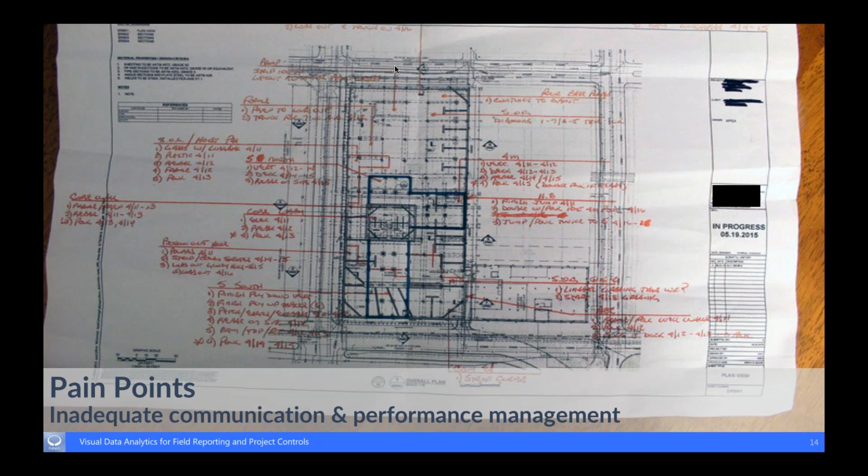Our problems aren't only associated with reporting, but also with our planning. Over the past 10, 20 years, perhaps closer to 20 years, our practices of planning and master planning have significantly advanced. But when it comes to understanding how much work could be done on a daily or weekly basis, there's still a whole lot of room for improvement.

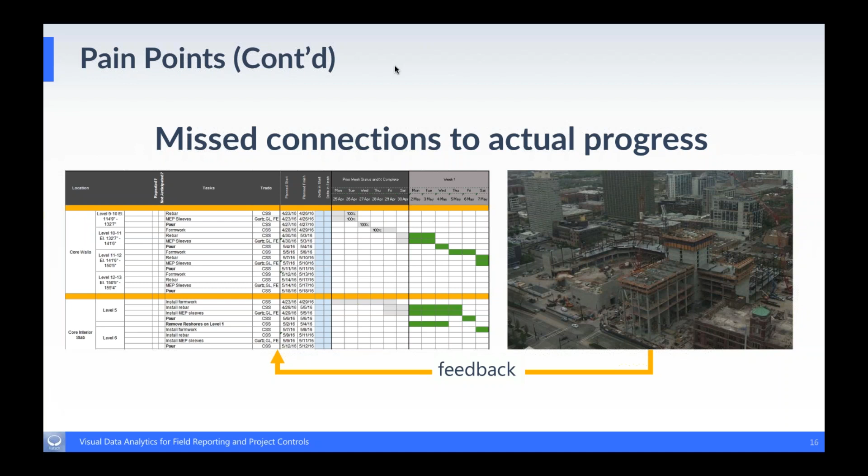Part of it has to do with the fact that even in projects where we bring last planners to be part of our planning process, we still see a lot of disconnection from actual progress. Most people involved in planning do not walk the job site daily to see how much progress has been achieved. And if those numbers are being reported, they're not being integrated as a basis of the plan, so we can improve and address issues before they surface on the job site.

And the last pain point we see with the cycle of planning, doing, checking, and adjusting is insufficient risk management.

Today, we still use metrics from earned value, schedule performance index, cost performance index, or for lean construction practices, we use percent plan complete. These are great metrics, but they're retroactive. What they mean is that they help us understand success and failure in the past, but they do not offer any insight about potential problems about to happen when it comes to looking at the schedule.

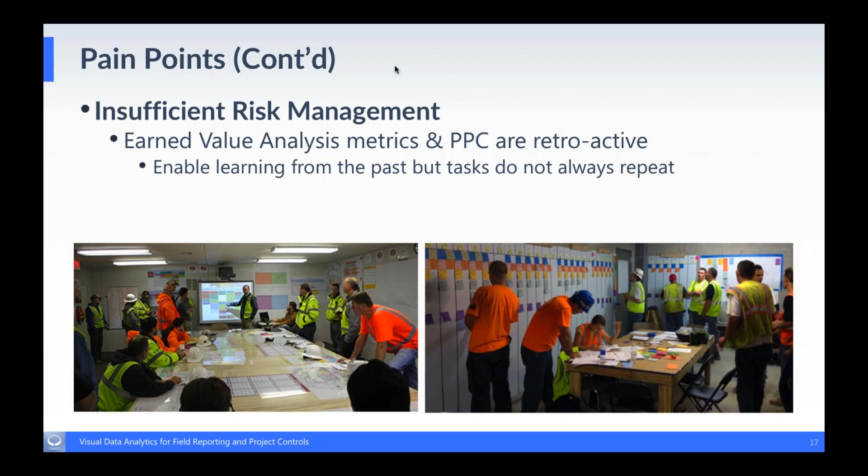So instead of retroactive practices, what we really need is proactive, because things in construction don't repeat. If they don't repeat, opportunities for addressing them become significantly minimal. So instead, we need proactive strategies that can identify risk on the job site, communicate that to our trades, so we can tap off potential delays from happening.

So what is the opportunity that we see? Earlier, we mentioned visual data. The growth and expansion of visual data on our job sites has been on two fronts. On one side, building information modeling has become a dominant method for communicating data across various life cycles. BIM is dominantly being used for design. A lot of construction companies are also using it for clash detection and coordination purposes.

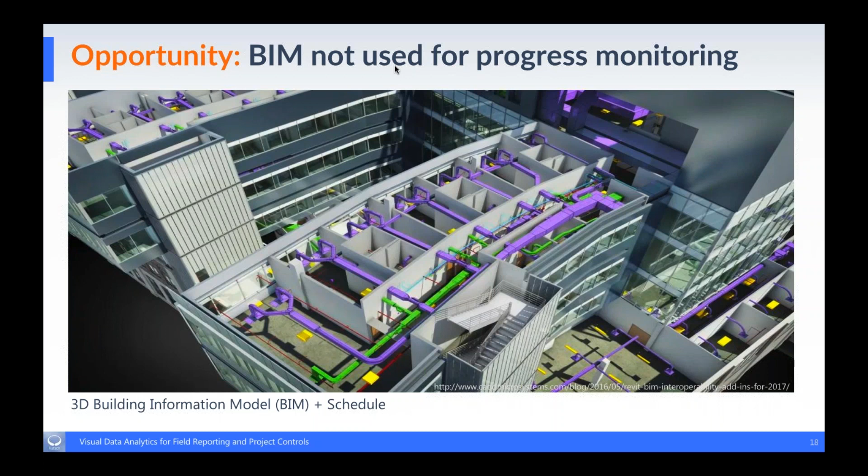But we also see that as a basis of assessing quality of the schedule in 4D BIM. What we see as an opportunity is to extend the application of the BIM that already exists and use that as a baseline for tracking progress. Be able to use that to communicate who does what work in what location, and see if we can understand how much work is being done per work location, per work package, or per trade that we have on the job site.

The other opportunity that we see is with respect to the feedback to that plan, the visual data that's being captured on job site, which is not actionable today. So as you saw in the second poll question, a lot of companies are today capturing daily photo logs. We all walk around with our smartphones, take photos, videos from various locations.

We use professional photography, an example of a company that you see in the middle that's based on reports published by them and our communication. On most of their job sites, they capture close to about 1,000 images per day. Time-lapse cameras in 2017 have almost become dominant, so we see 1 or 2 cameras on almost every site. People are using action cameras to walk indoor locations, videotape work, and use that for various applications.

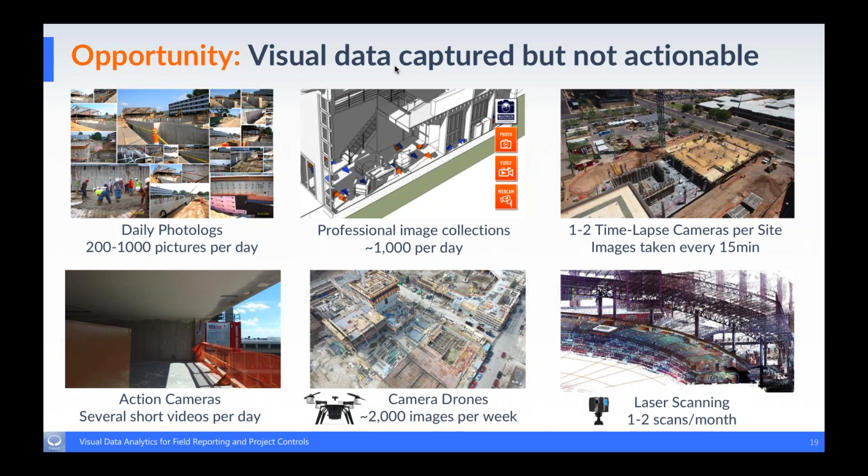Drones have provided a significant opportunity for this visual data capture. The speed and amount of visual data being captured has significantly grown. And lastly, as we've seen through various great use cases that Fiatech has presented over the past 10 years, laser scanning has also become a dominant tool. So all of these various kinds of visual data could be used as feedback to the plan, but as they are today, they are not actionable.

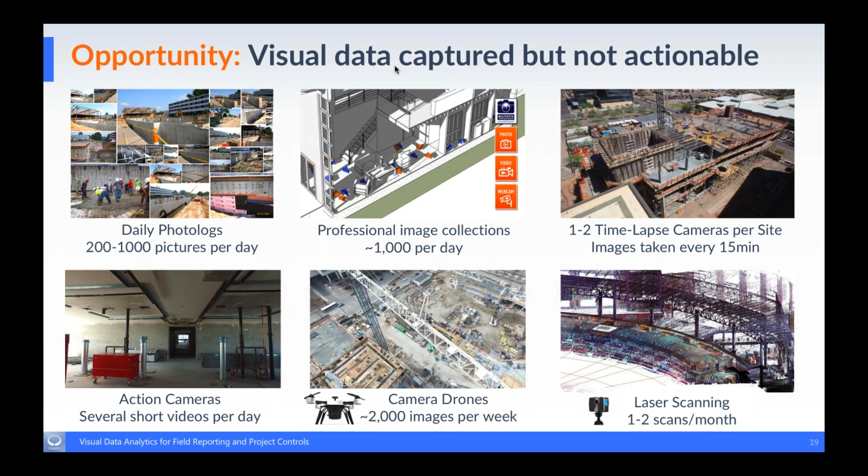So what we've been focusing on as part of the effort we started at Fiatech with CCC and also with Zachry is to see how we can integrate our visual data with the BIM in the form of visual production management systems. The idea is pretty simple. Our intent is to take advantage of the most inexpensive form of visual data, being images and videos, automatically generate 3D point cloud models from that visual data over a project timeline, integrate them with the BIM and the schedule so we can form our visual production models.

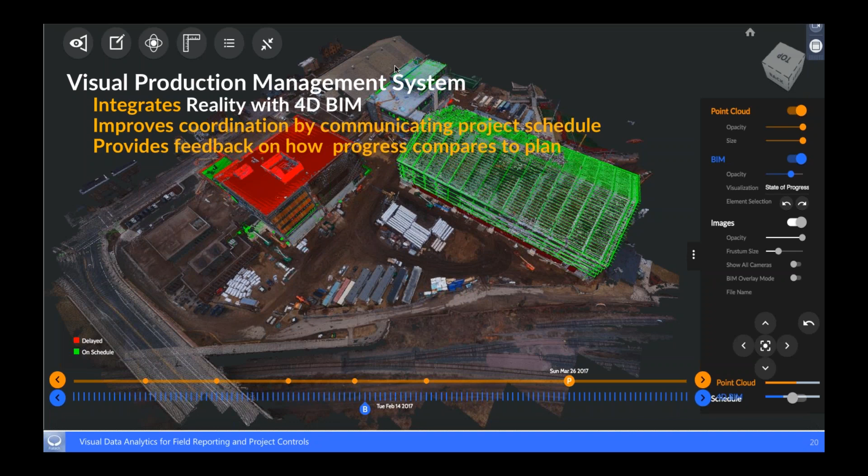Then use these visual production models that show you the reality on the job site versus the plan to understand progress and productivity and communicate the work that needs to be done on a daily basis. We've also looked into machine learning algorithms and their capability in terms of identifying risk based on the trend of progress and productivity, and see if we can share that insight with our project teams so they can tap off problems before they surface on the job site.

So the intent is to be able to take these into coordination meetings, use reports that are all visual, that show you how much work was expected to be done, what is actual, and use that as the basis of our coordination. So a superintendent can transform our coordination to center around risk and how we can tap it off before it surfaces on our job site.

So with that, I want to give you a broad picture of what this visual production management cycle looks like. It all starts with visual data capture. So we have images, videos, and perhaps 360 that would be captured through cloud-based engines, for example the one that we've also developed. We can generate reality models over the project timeline.

BIM that is being used for coordination will be integrated with the schedule and will form what we call a production level 4D BIM. The production level 4D BIM would be integrated with the reality model and will form a 4D visual production environment.

Within this model, we will be tracking progress per location, per task, per work package. We will track productivity by tying the input, being the worker hour, and using machine learning algorithms we can identify risk, bringing that into a form factor that the superintendent, who may not be savvy with BIM, can use on the job site to revise the basis of the plan, look at the schedule, and use that as a step for the next cycle.

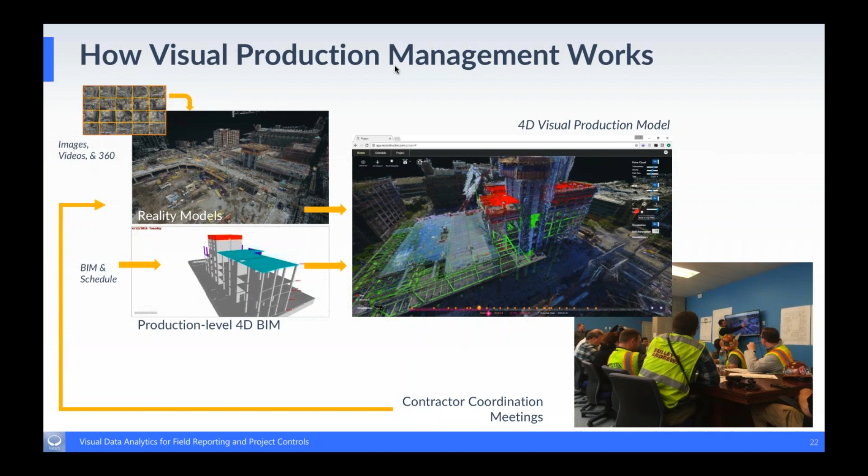In that spirit, we looked into two specific projects. The Mars Rover project was based on a technology that was developed earlier, and this project was supported directly by CCC and Fiatech with the intent of improving how we do visual field reporting. The idea was that now we have all this visual data, the images and videos.

Now we have the ability to generate point clouds with them. We also do a lot of laser scanning. What are the opportunities that we can take advantage of with existing visual data to localize where our field engineers are in 3D on the job site?

The intent is to take advantage of these photos to automatically understand where we are on the job site, to be able to offer on-demand and mobile access to project information. Imagine you're walking on the job site and you take a photo. We want you to really be able to get access to the information, find your location with respect to a building information model, and use that as a basis for extracting information or reporting back.

So what was the key requirement as part of this project? We wanted to make sure we have a rather real-time or near real-time identification of position and orientation. Now, over the years, perhaps over the past 10 years, a number of technologies have been introduced that can facilitate this. We have GPS, ultra-wideband technology, 3G and 4G that can provide access to cloud-based systems, but each and every one of them, in their own ways, can create challenges.

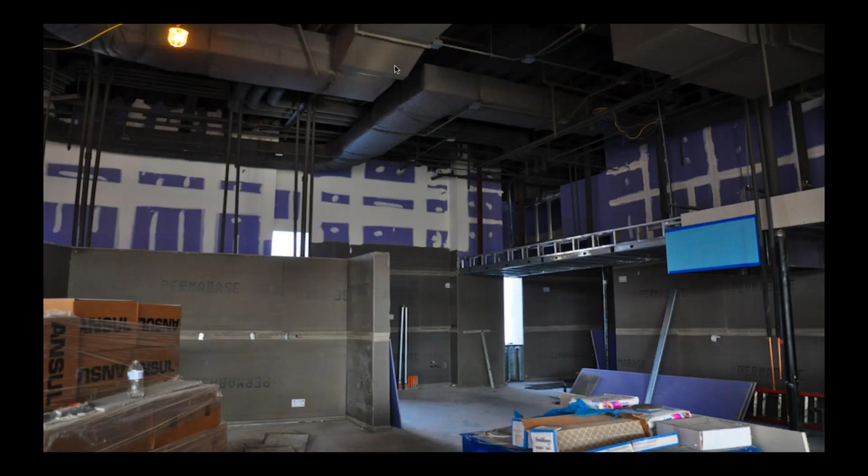So the idea was simple. We wanted users to walk around with their existing smartphone and take photos. The photo would be matched against the 3D models we've already generated, and by identifying the location and orientation of the user, we'd be able to get access to information, or let the user directly provide information as an overlay on the image or as an attachment to the building information modeling elements.

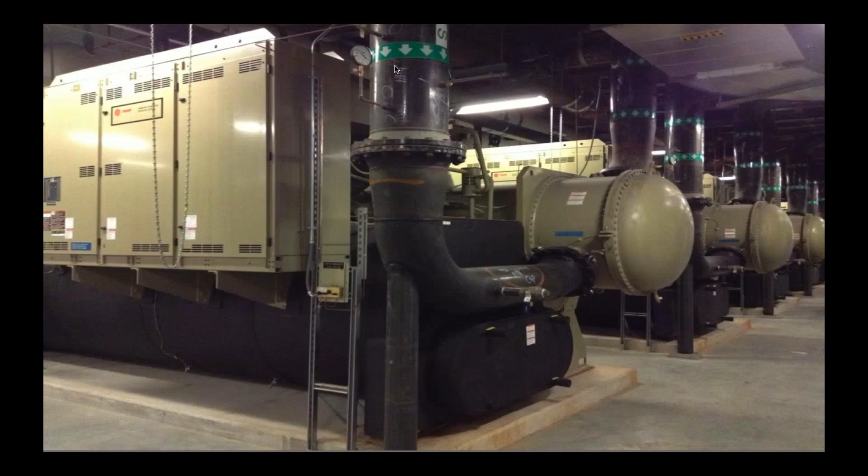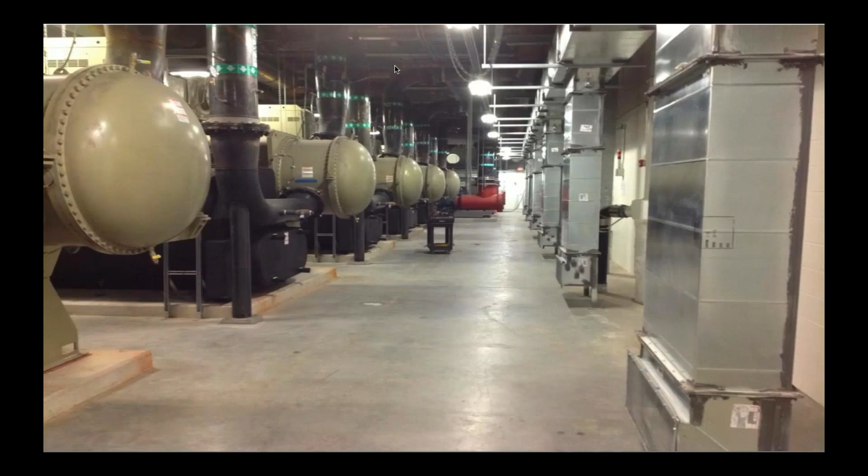Now, in the context of BIM, the idea was that for us to take a photo, understand its location and orientation, and overlay a picture of BIM over the image so we'll be able to see that. Again, the idea is to find location and orientation as it relates to a building information model, overlay that on BIM, show it from various perspectives, filter based on the trade of interest, and make sure this technology is reliable so you can actually use it from various points of view and perspectives.

Now, the good news is that when we wanted to start this project, we immediately learned about the significant amount of development that has been done in CCC. Over the past, I believe, 4 to 5 years and perhaps a little bit beyond, CCC has developed a C3D mobile solution that provides access to BIM data on the job site.

It also has a capability of providing BIM-driven progress tracking. So while you're on the job site, not only can you get access to your project information, but you can directly provide feedback in terms of how much progress is being made, punch list items, or quality control items directly within the BIM environment.

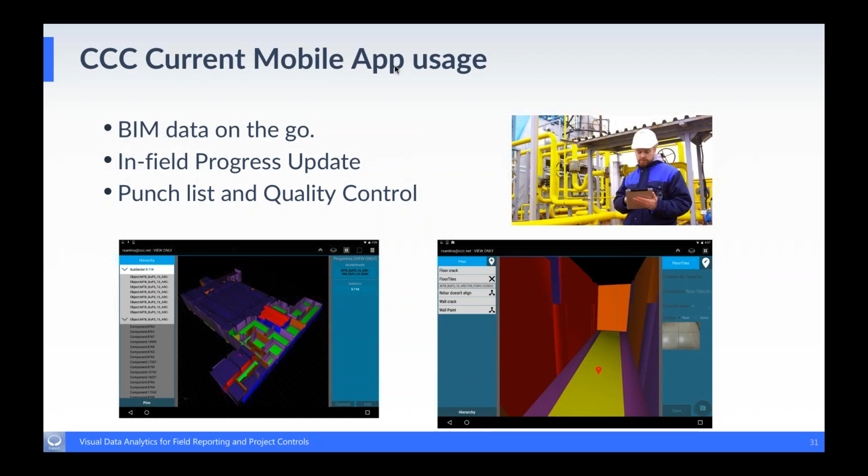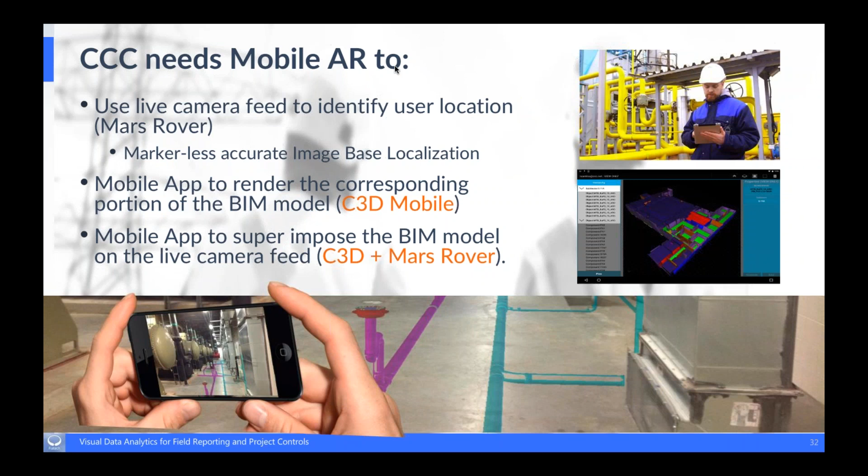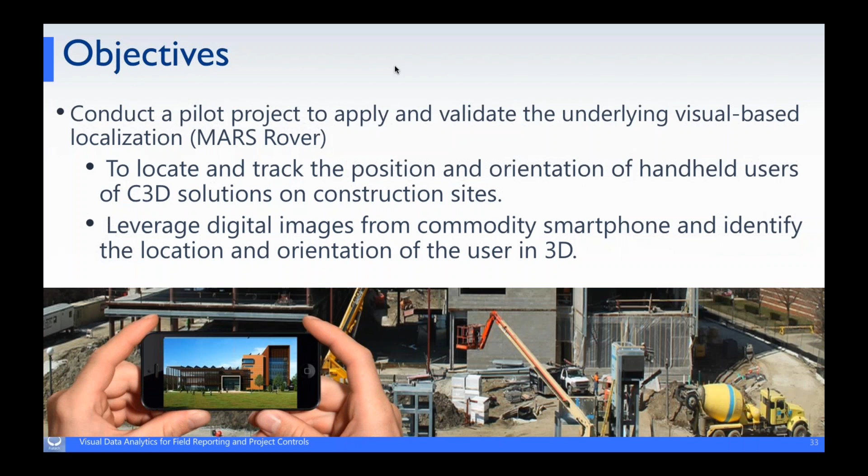Using that as an opportunity and the capability of localizing a user with respect to a point cloud, we wanted to see if we could align our point clouds to BIM, localize and orient a user with respect to BIM without using GPS or location tracking, and tap into the wealth of information stored in CCC's C3D data. Rather than add new kinds of visual data, we wanted to take advantage of existing visual data captured by smartphone.

What specific requirements did we want to tap into? First, field reporting needs to be done on commodity mobile phones, which the C3D solution from CCC already offers. We wanted to associate project information with 3D elements at any desired level of abstraction, regardless of work breakdown structure or model breakdown structure, so users can associate punch items, quality items, or progress reports with the plan, with high precision association within 2 to 5 seconds.

The intent was not to develop a live augmented reality model, setting aside the safety issues. Rather, we wanted a high precision solution that within a few seconds can augment still photos with a picture of the BIM, to use as the basis of field reporting. We wanted this in the form of a cloud-based platform that would work with or without BIM.

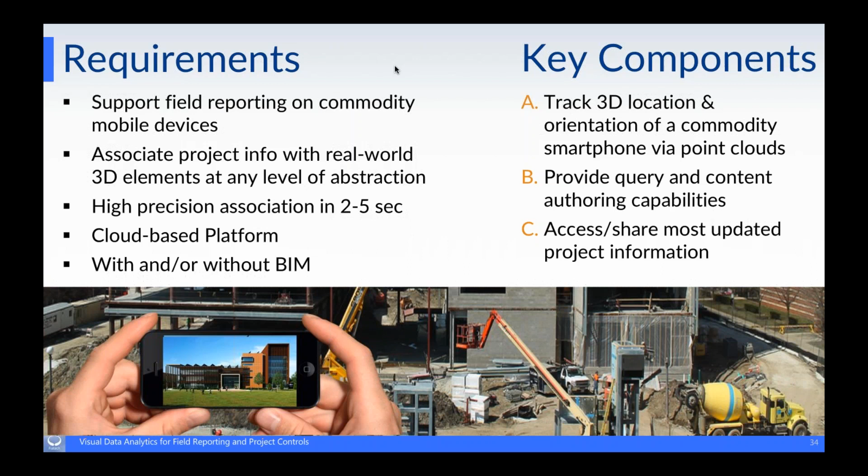So again, three components: tracking location and orientation of any user with smartphones with respect to a point cloud, offering query and content authoring capabilities with or without BIM, and accessing and sharing the most updated project information when connected to data. We had abilities to align static images with 3D point cloud models, and also looked into using videos to map locations in 3D and identify the user's orientation.

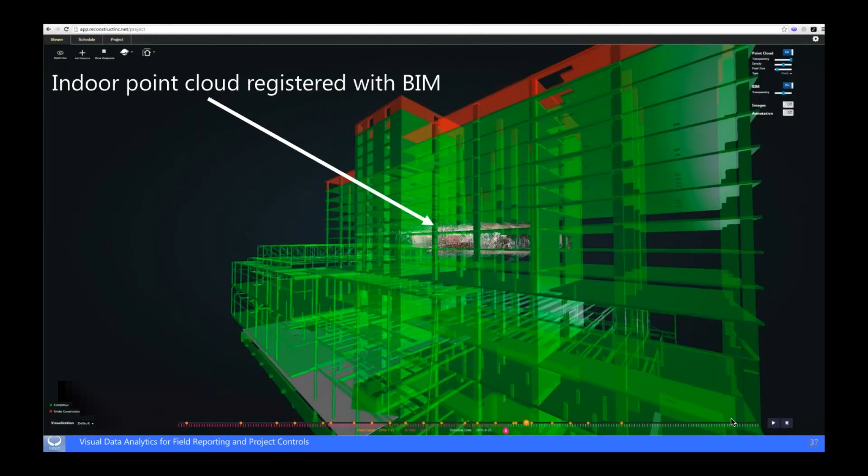Once we have this capability, we can feed it into our process for generating dense point cloud models, like the ones already shown, and use that as the basis of alignment. Once this map is done, say on a Friday, when workers or field engineers come back the following week and start taking photos, we can always localize them against this map. This map can also be aligned with BIM, indoor or outdoors, giving access to BIM information. As part of this, we wanted to offer a number of capabilities.

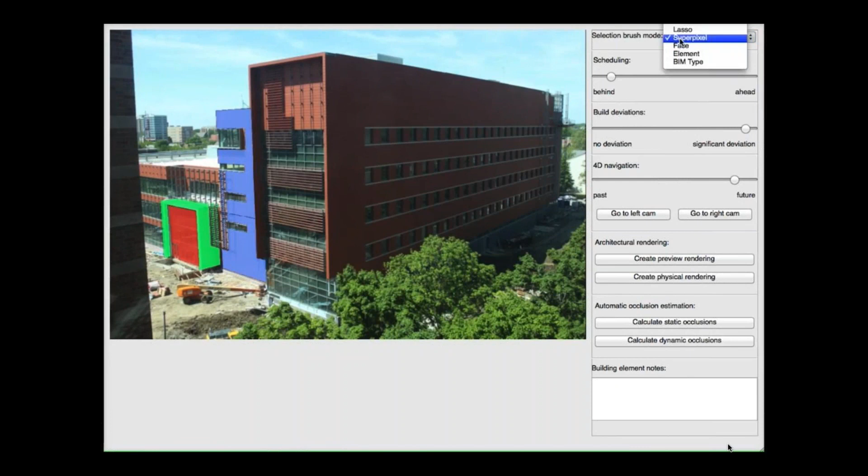One goal was to directly tap into the content of images and work with any level of abstraction. Here I'm showcasing the ability to overlay BIM on an image, with the user manually reporting from any desired perspective using images captured with a smartphone, color coding or providing percent complete as it relates to tasks, quality items, or punch lists.

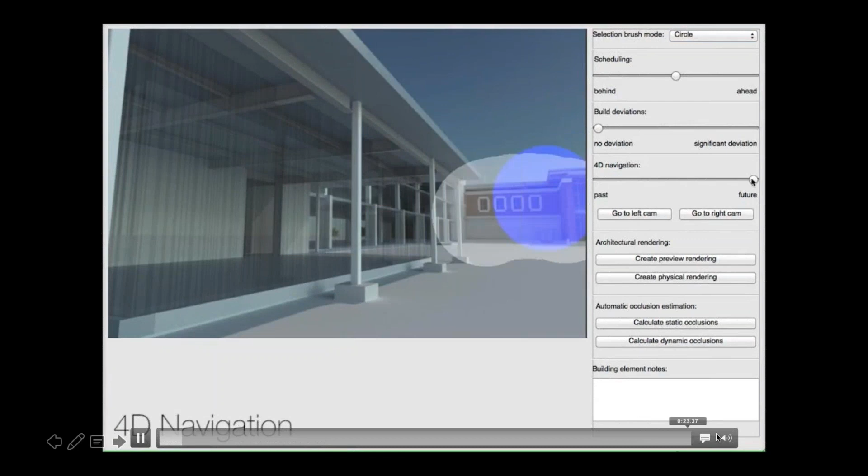You see the different capabilities, and these color codings would all remain preserved over the timeline. You can start with a BIM perspective, interact with the content, scratch the surface of your BIM image, and go back in time to get access to the most relevant images. You can also look into capabilities of doing that with respect to an image—sorry, I moved too fast here.

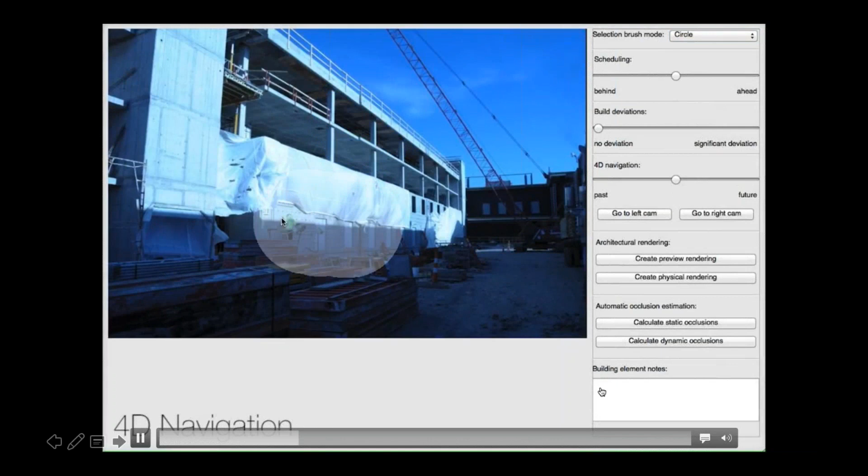Here we show the circle brush selection mode. We can click on the surface of the image, brush over the surface, and go back and forth to find views of BIM or views of other images that have been captured over time.

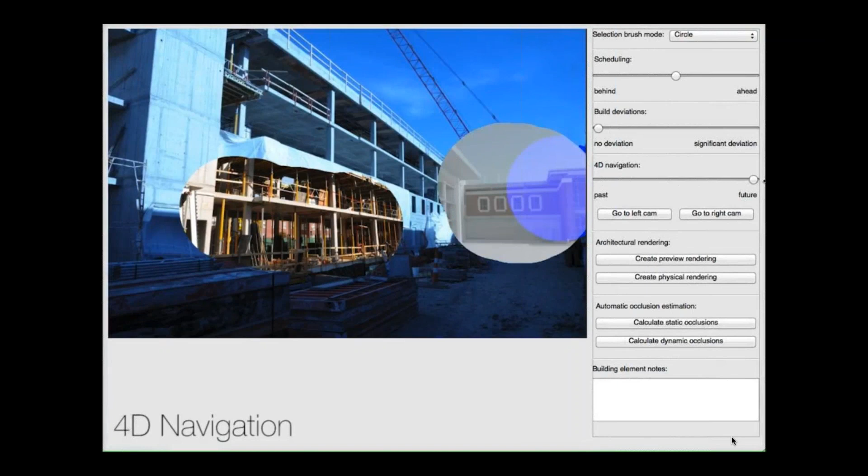As part of this, we wanted to do an integration with CCC's C3D solution, so we worked on a number of use cases. One was to see how we can tap into existing laser scanning point cloud data, and also tap into the images captured with laser scanning as the basis of mapping and localization.

Then we started working on image-based capabilities, and lastly we wanted to work on video-based mapping and localization, which is essentially what we've offered as part of this project. This was important because we wanted to make sure that if the user doesn't have access to data or wireless, we could still achieve mapping and localization with maps stored on the client device being used by the user.

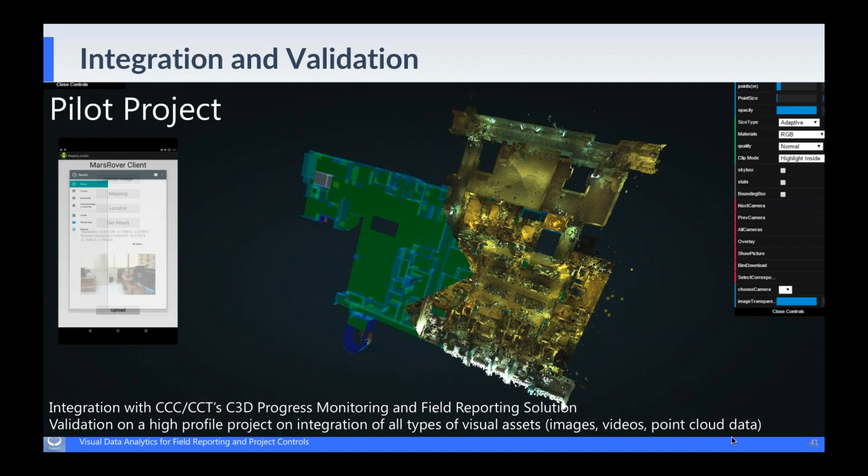So we achieved a number of objectives as part of several case studies in this project, one of which was to tap into videos directly, do 3D reconstruction, and achieve mapping in real time on commodity phones.

Second was localizing users—meaning you go back to the scene, use the same device or same type of device, take photos, and be able to map and identify your location in near real time with respect to that environment.

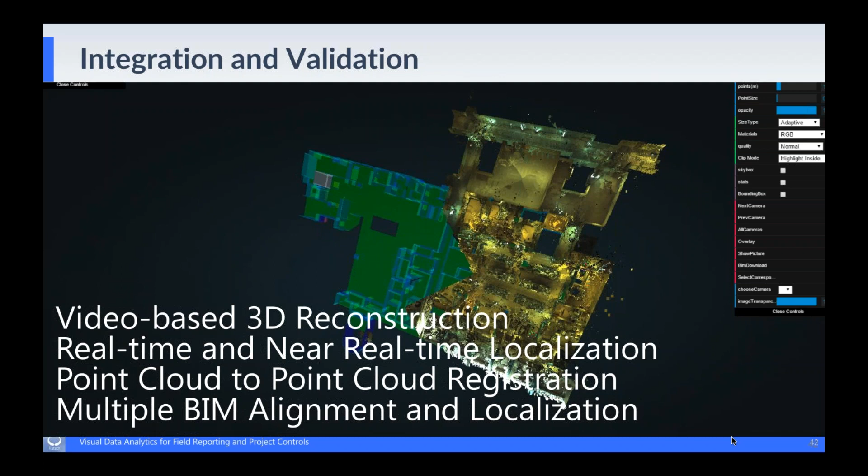We wanted to make sure we can do point cloud to point cloud registration, whether these point clouds are captured on the same date or over a project timeline. We also wanted the system to take advantage of multiple BIM files as part of our coordination efforts, and be able to localize users with respect to that point cloud and that BIM.

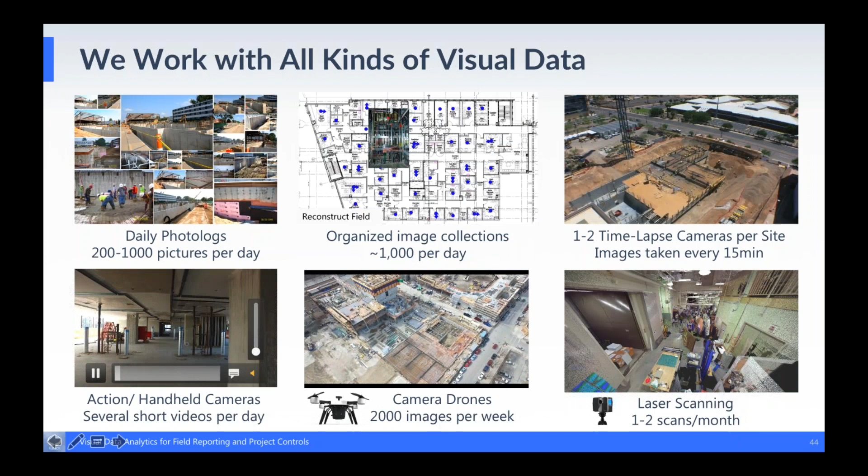This time we wanted to make sure we can integrate all types of visual data, specifically focusing on capabilities that have to do with drones. Over the past few years, a number of Fiatech members have acquired photogrammetry capabilities, or have worked with startup companies in this space.

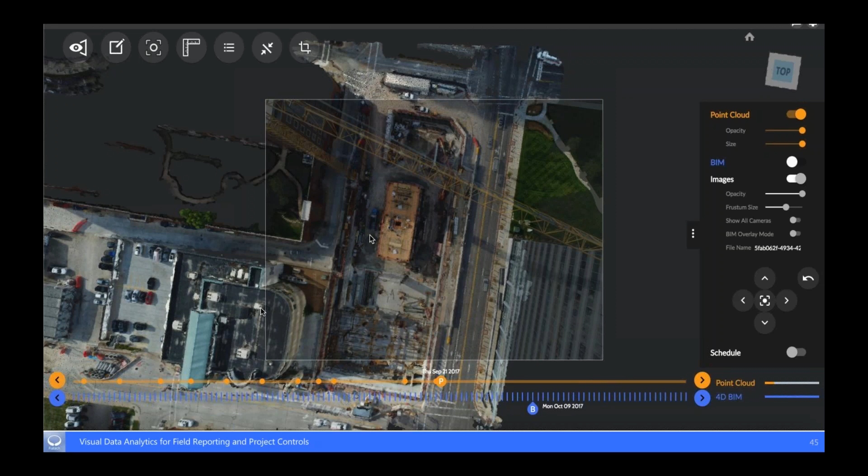This is the solution we've developed that takes in images, videos, and 360 content, automatically generates point clouds over a project timeline, and offers on-demand access to images. You can click on any desired viewpoint, go into that 3D viewpoint for that location, and then get access to the high-resolution image.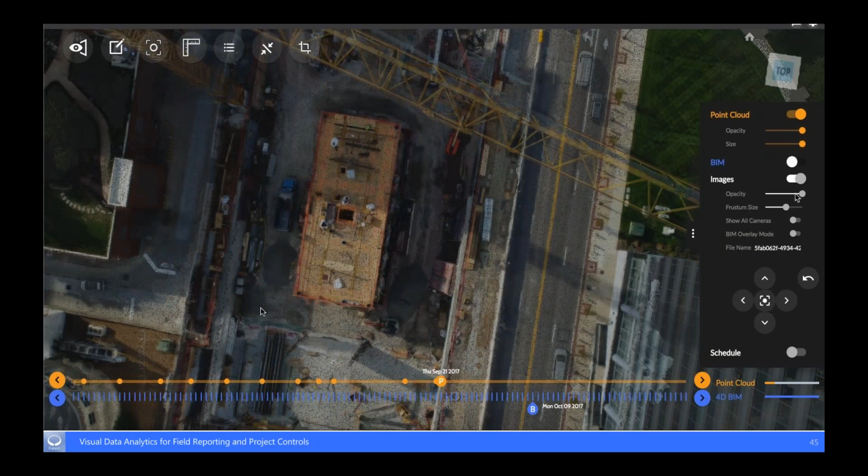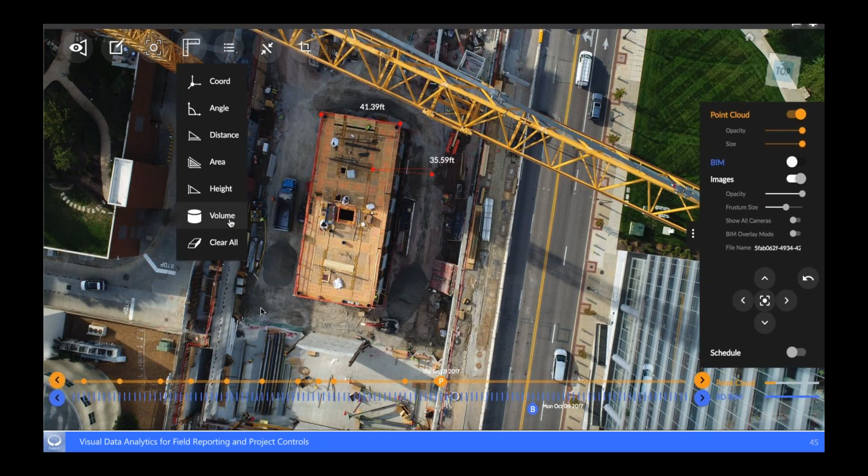While within this web-based integrated environment, you can actually do measurements—measure length, volumes, height, and other things relevant to progress tracking. Or you can simply annotate directly on the contents of an image. We also added the capability of tracking volumes over time.

Some of these capabilities are currently available in offline solutions that software vendors offer. We want to offer this as part of a web-based system.

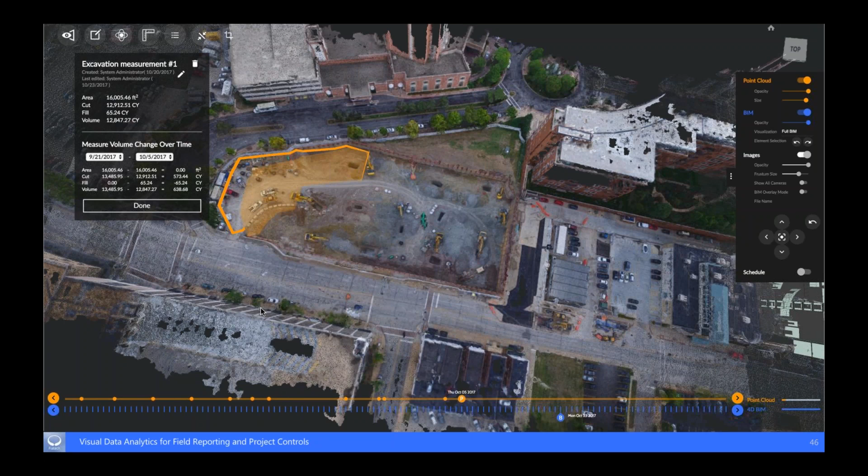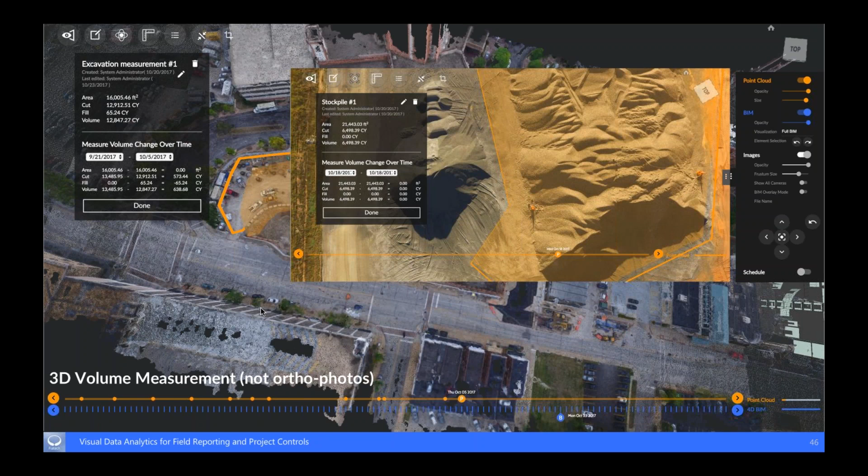So we started looking to direct volumetric measurement from point clouds, not simply orthophotos generated by drone images. We've actually done a pilot project with Zachry at one of their sites to expand the application of this to stockpile measurement, being able to measure cut and fill on demand and track changes of volumes over a project timeline.

Now, these reality models should be integrated regardless of whether they're part of our Mars rover capability or part of our reporting capability. The idea was that without using GPS or any ground control points, how can we localize new images with respect to previous models?

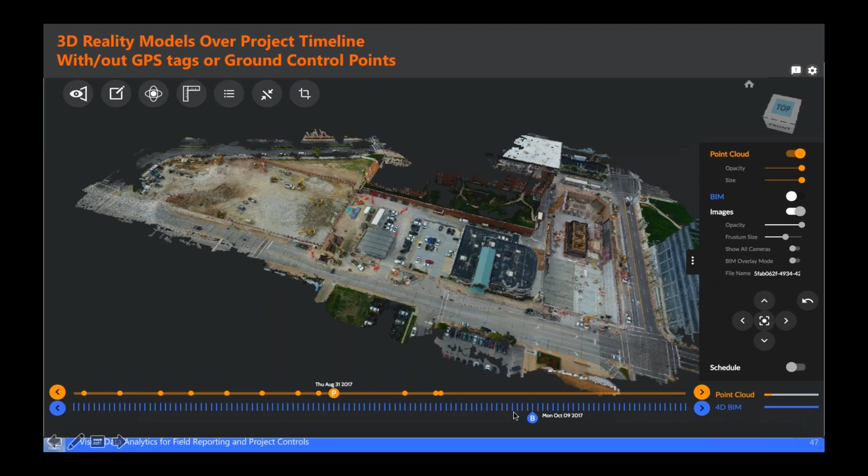At the bottom of the screen you can see a timeline. Every one of these bubbles represents one of the point cloud models. I'm starting with August 3rd, then August 31st, September 14th, September 21st. So on this job site, drones were being operated, images are captured, 3D models are generated, and the models are automatically aligned without using any GPS tags or ground control points.

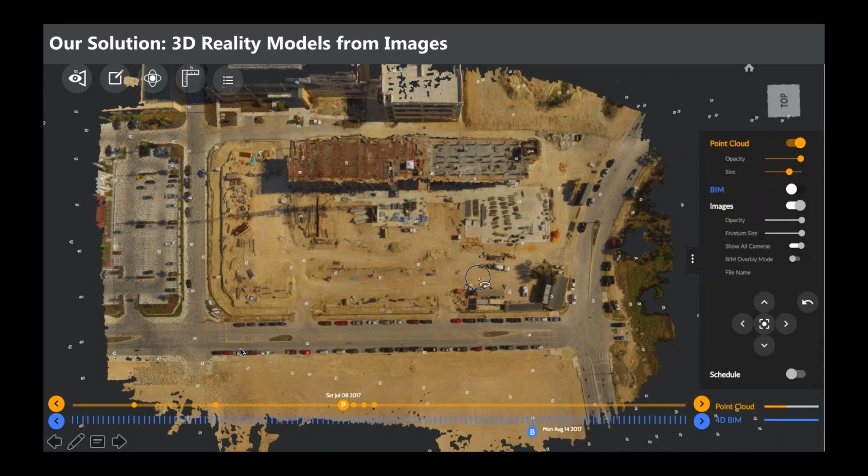We've done a number of case studies around this. The example I'm showing you right now is a site from Zachry where we've tested this capability. It was important to have a complete automated workflow, meaning there will be a web-based platform that the user will be able to directly upload images to.

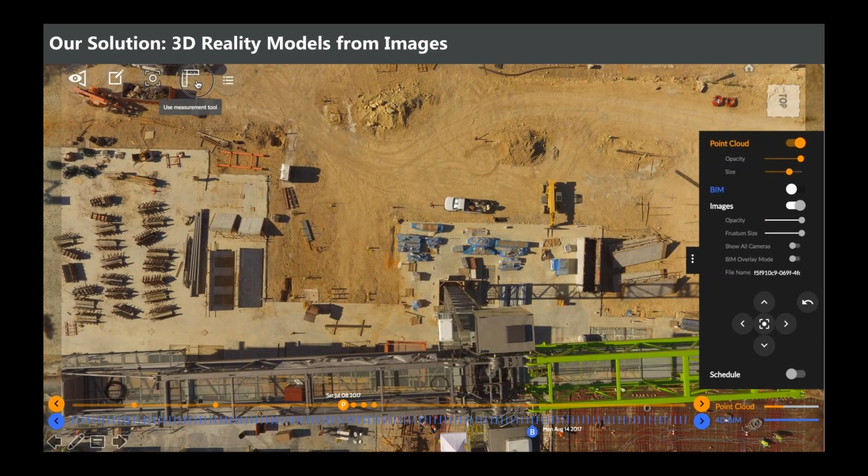You click on any desired location and you can immediately get access to the high-resolution image. While you're looking at the 3D environment with a high-resolution image as an overlay, you'll be able to do all kinds of measurements and annotations that I mentioned before.

Being able to do this over time, we wanted to test this on various sites. In this case, you can actually see probably around 15 or 20 captures that were used as part of this assessment.

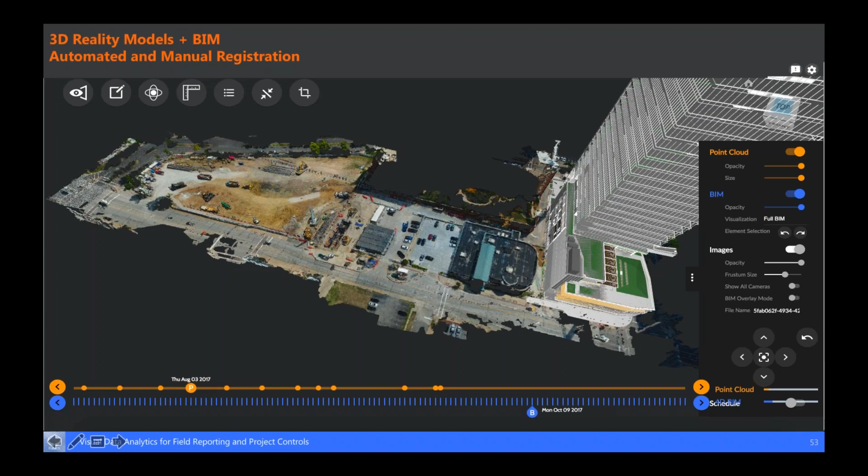Now, when it comes to integration with BIM, we've looked into a number of capabilities on two sides. One, mostly we've looked into the unique capabilities that CCC brings by being able to bring BIM to mobile phones. This happens to be a different version of a BIM rendering capability doing this in a web-based environment. The intent is to bring BIM, and get access to the same information you have in coordination.

Now, the next piece of this is progress tracking. We need to form what we call a production level 4D BIM, and as part of that, it's important to tie in project schedule to BIM. So we worked on a number of capabilities to take advantage of work breakdown structure and perhaps automate several steps in the mapping of tasks to BIM elements.

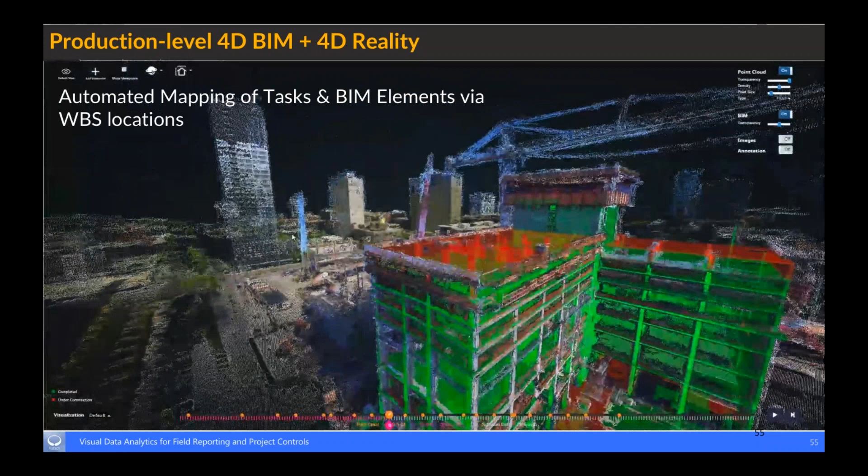So we can save somewhere between 30 to 40% of time typically spent on creating 4D BIM. Once the 4D BIM is created, you'll be able to use that as a basis for tracking progress. You can understand production rates on a daily basis and have that contrasted with reality, those bubbles you see on top.

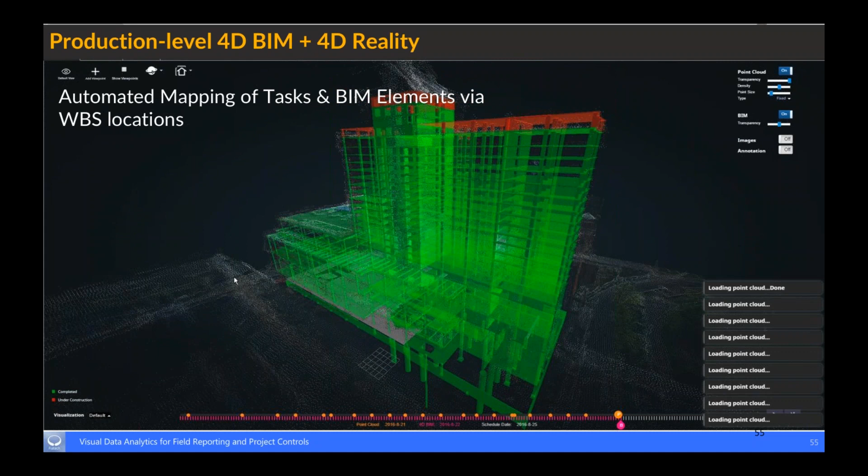So in this case, I just turned that point cloud off. You're looking at a very standard 4D BIM, but this time done in a web-based environment, and then I'll go ahead and overlay the point cloud. The user can change the date associated with the point cloud at any time, and within this web-based environment, you'll get access to a different point cloud at a different point in time, so you can contrast reality versus the plan.

So when it comes to predictive data analytics, we tapped into research we've done in the past, and started looking into how we can contrast expected versus actual, and report percent progress per task, per element, per work package. Automation can be done if visual data is being captured at a high frequency, but we think that even if that's done automatically, there will still be a significant number of tasks that require manual input.

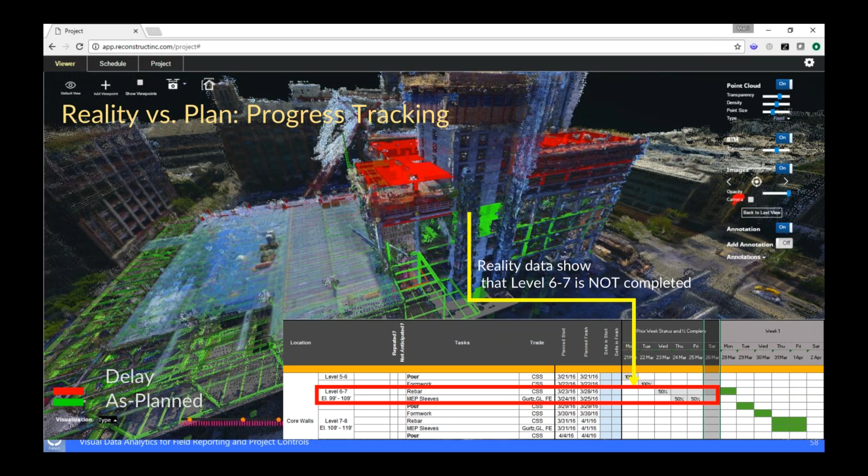This is where there's major power in using a mobile solution like CCC's C3D, because you can tap into BIM and the expertise of the trades conducting the work, have them report directly in the BIM for you, so you can do quantity-based progress tracking. Then use the visual data, your point clouds and images, as a layer of verification, one you can use for verifying billing, verifying completion of the work, use as a basis for your punch list, or even for communication on the job site.

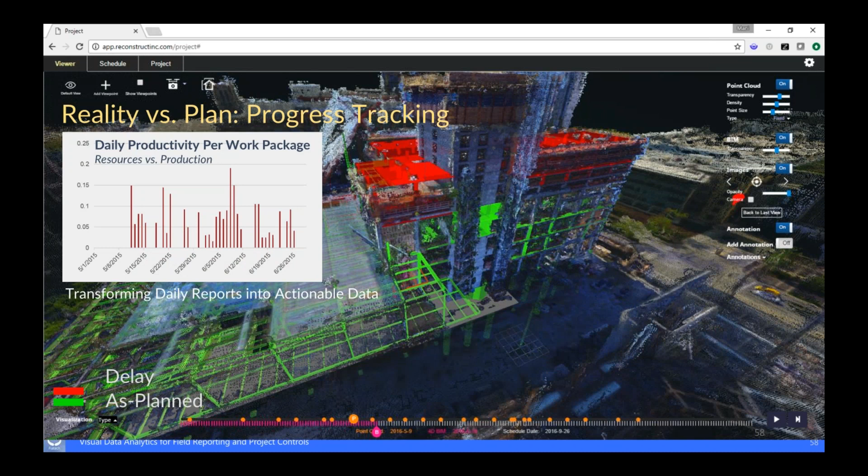If you ask them to provide that input, you can also tap into crew size information. And if you get access to crew size information, now you can connect your input to output, and you can start providing productivity information. Now, one of the things that we've done is to tap into machine learning and use the trends that we see on progress and productivity to identify risk.

We've devised a workflow that is consistent with what we typically do in any project control setting, which is measuring and communicating risk per work package. So instead of being retroactive and only measuring PPC or earned value analysis metrics, we measure risk for potential delays.

So we can collaboratively revise the look ahead schedule and automatically see the 4D BIM being updated. And we can run that to make sure all the trades are on the same page in terms of who does what work in what location, get buy-in from them on the work, and conduct the work as planned.

So we've done a number of assessments on the potential of using visual production models. One thing is clear, more than anything: this improves our capability of coordinating work on the job site.

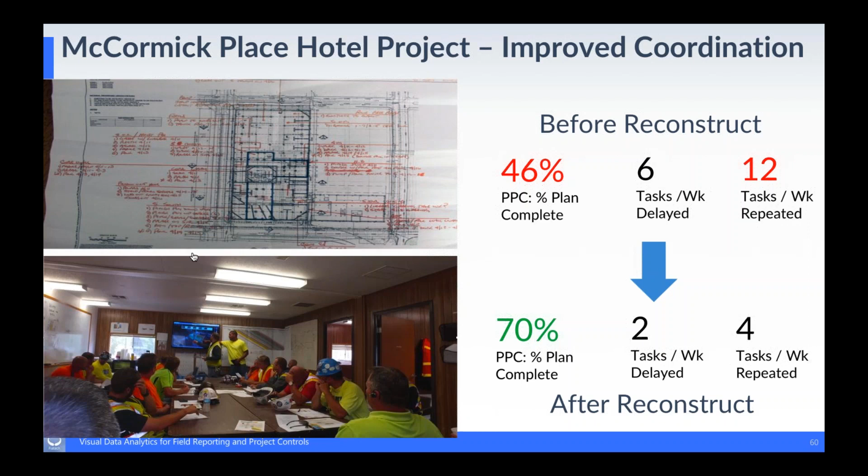So in this case, over a span of 6 weeks, we tracked a number of metrics that were relevant to the site, being able to tap into PPC, number of times that the tasks were being delayed and repeated. And we're able to show that access to actionable data can help project teams improve their own performance. We can significantly improve PPC and minimize the number of times that the tasks are being delayed or repeated.

So let me be very clear on how this could be achieved. As part of this examination, we wanted to look into what are the root causes that typically lead to issues that we have with our coordination.

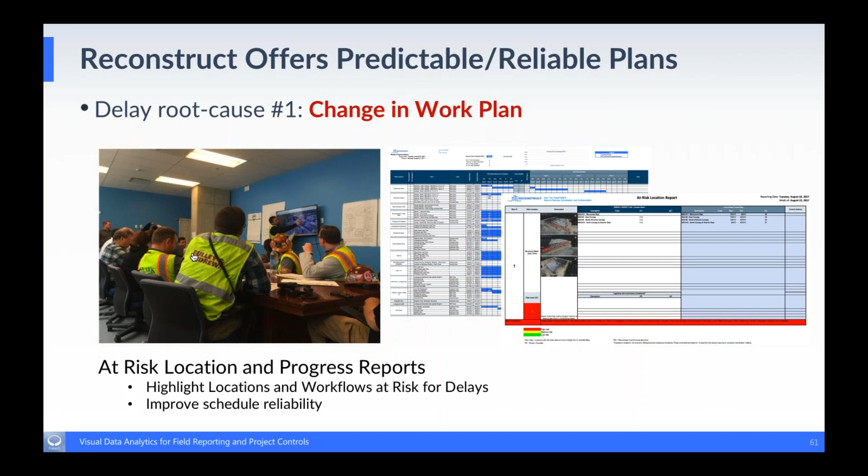Number one that we typically see on many job sites is frequent changes in work plan. This is actually mostly relevant to projects where you're adopting a weekly work planning process. So what we did in this case was to offer progress and risk reports that would highlight locations and workflows for the superintendents that these locations are at risk for delays. So the superintendent now has actionable data that it can use to improve reliability of the project schedule.

The second issue that we observe is oftentimes work areas are simply not available or the handoffs are not being completed. So the fact that the system can provide you with knowledge of who is doing what work in what location every day, it provides you with real-time knowledge of task completion, especially if it's done through a mobile phone device like what C3D solution does, availability of workspaces, and being able to have them access to the backlog of tasks that they can commit to.

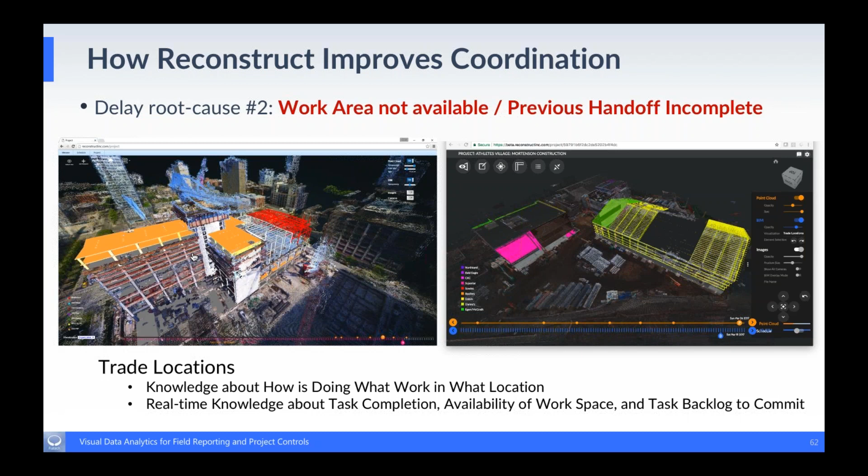Now you're bringing the power of planning to the personnel that you have on the job site, enabling them to contrast what exactly gets done on the job site versus the plan, and use that as a basis of improving your coordination. And lastly, obviously, underestimated effort.

This is a major issue with respect to lack of skilled workforce. So we think that this underestimated effort can be addressed by having access to actionable productivity information. If you gauge productivity per work package, per trade, every day, now your superintendent will be able to tap into this data and use that as a basis of improving the plan.

So again, I go back to the numbers that I showed you earlier, and I just want to summarize it by mentioning that improving coordination is a factor of having access to actionable data. Data that can provide you with that feedback to your plan that is timely, that is accurate, and is verifiable because it's based on visual data.

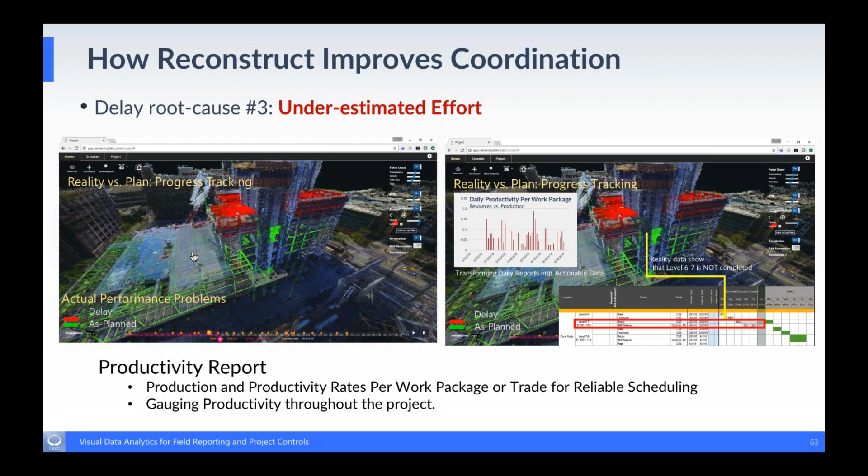So what are the takeaways? Based on things that we've shown you today, we want you to have a few takeaways. One, you can tap into your existing visual data. What you saw from the quick poll report clearly showed you that visual data already exists on your job site.

You can use that to improve the basis of your planning, achieve enhanced coordination, and use that environment within cloud-based or mobile phone apps for communication and field reporting. More than anything, a system like that can provide you with a transparent process view, one that lets you contrast reality with a plan. You can achieve more predictable plans if you start adapting this as part of your workflows.

Real-time field reporting is a specific use case we looked at as part of our assessment of the Mars rover project, along with streamlined billing. The visual data can provide you with a layer of verification. For every work package, you have access to BIM, and solutions like C3D can give you access to the quantities. You can access quantity expected versus reality from the visual data, and use that as a basis for billing on objective verification of the work.

I'm not going to comment much on quality control—a lot of Fiatech members have tapped into this significantly. Another additional value of visual production models is safer operations. Your regional safety engineers can sit in an office, get access to a cloud-based system through a web browser, and see multiple projects, annotating them for safety as it relates to their plan and to the reality on the job site. You can also share the same environment with your trades and subs. So we think this is a system that brings owners, contractors, and subs onto the same page in terms of how much progress is being made.

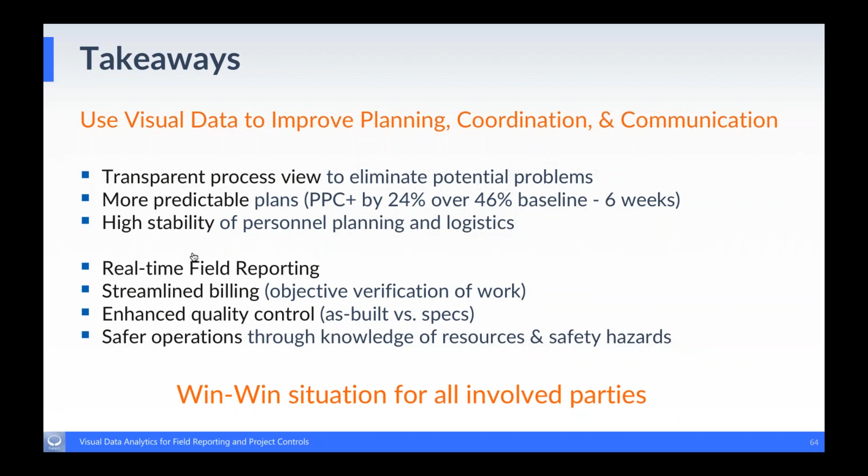So now I've shown you what capabilities are possible in 2017 leading to 2018. I want to speak about things that are in the roadmap. There are two elements when it comes to research that we've been exploring.

One is conducting flights of drones, or data capture broadly, which is still an issue we want to address. We've looked into what issues are not fully addressed on the commercial side, one being drone operation. Today, the majority of drone operations are conducted in 2D—you have a lawn mowing pattern, flying your drone over the job site without being able to achieve any autonomy around operating your drone around the structure. So when it comes to vertical structures and capital projects, you still want to make sure you can assess accuracy and completeness of the capture before you conduct your flight.

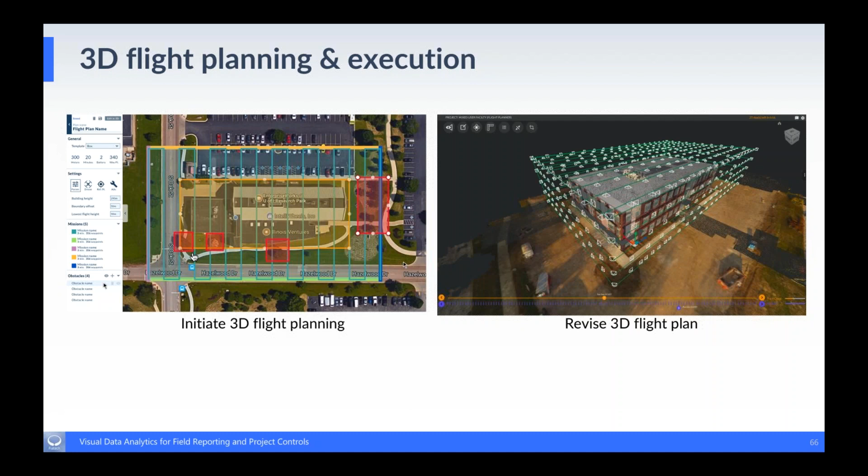So we've also used these visual production models as a basis for creating a 3D flight planning app. The interface is very simple: you start in 2D, identify the area you want to map, and geofence locations that are unsafe. Then you'll be able to review and revise your 3D plan in a 3D environment, and make sure before you take your drone out that you can assess accuracy and completeness of the capture.

The second component is what we can do indoors. This was actually an initiative brought to us by two construction companies, who wanted us to see if we could tap into commodity ground robots for the purpose of mapping. What you see is just a prototype which moves autonomously after first manual capture, meaning the user would manually operate this on a job site.

It would learn and map the environment based on similar algorithms to those I showed you earlier as part of the Mars rover project, and then be able to localize the robot with respect to that environment. This capability would let you create a map, and you can use this over and over in a work area to map that space.

Now, what are the elements associated with safety? What are the elements associated with the workflow? What is the reaction of the workers? These are all things still in the works. But what you see is the capability of a technology that can enable a more autonomous capture indoors.

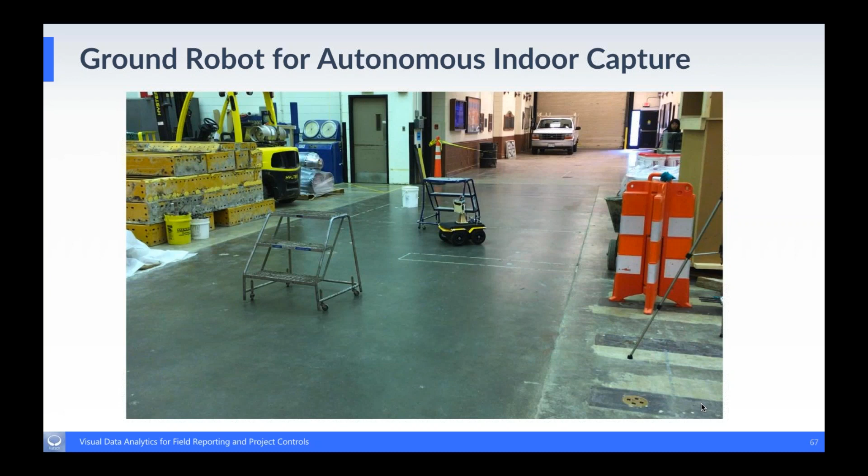So with that, I want to pass the token to Stuart so he can initiate our panel discussion. I wanted to just quickly offer you an insight on projects we've done leading to these questions. Stuart?